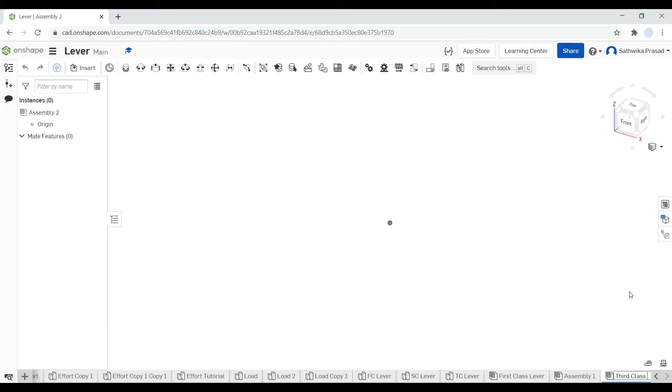I'm going to create a new assembly, then right click to rename it. I want to rename it third class lever. I forgot to label my previous one, second class lever, so I'm just going to rename that quickly too.

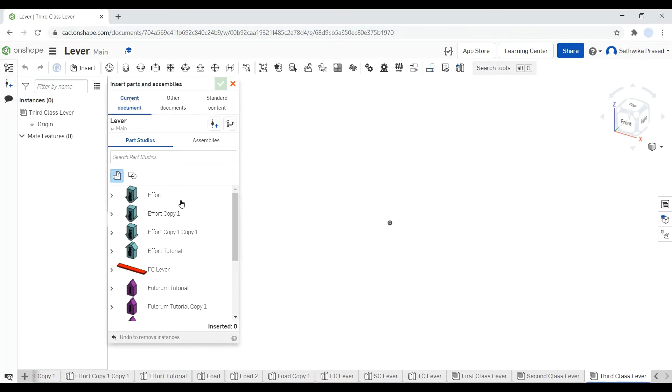Now on my third class lever, I'm going to insert all of my pieces back in. Remember, in a third class lever, I'm going to choose my third class lever piece. My effort is going to be this one, my fulcrum is going to be this one, and my load is just going to be this one. I didn't really need to make that many copies, but don't do that, be efficient. Click your green check button.

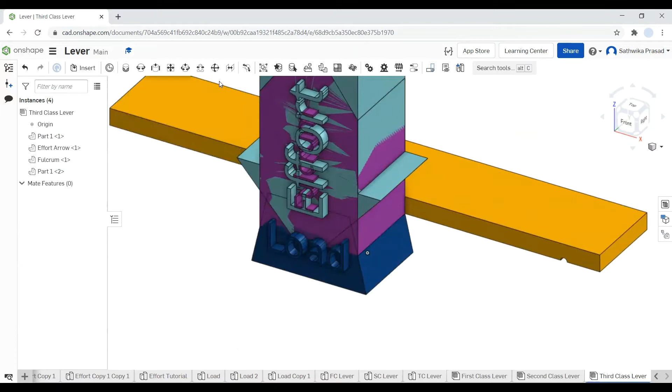Drag your pieces out. Then what you're going to do is, again, you're first going to insert your fulcrum in. Your fulcrum is super important.

So referring back, I just want to clear this up, guys. In FRE 123, for a third class lever, your effort needs to be in the middle.

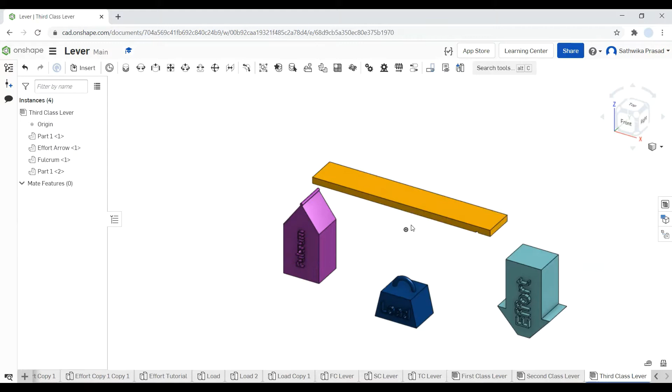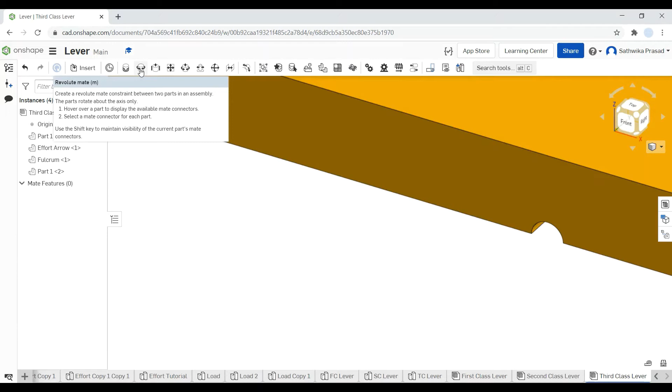So what we're going to do is first fasten in our fulcrum. I'm going to zoom in to my left. Now remember, in any lever, other than the thing that should be in the center - the effort, resistance, or fulcrum - the other two parts can be switchable. I just put them in two different places so you guys could have some variety.

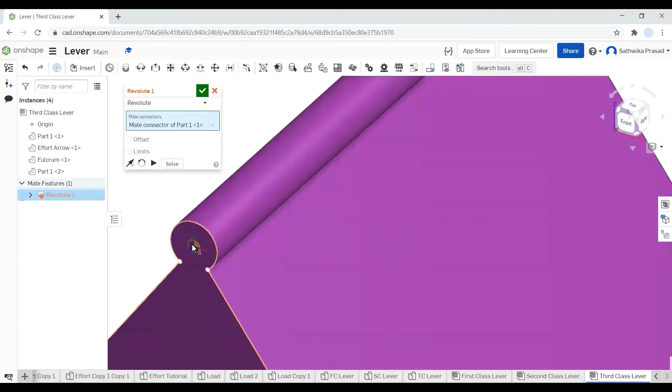I'm going to go into Revolute Mate, zoom in, and put my mate here. Then I'm going to come to my fulcrum, zoom in, make sure my mate is facing this way, and bam! I'm going to click my green check button and exit my Revolute Mate too.

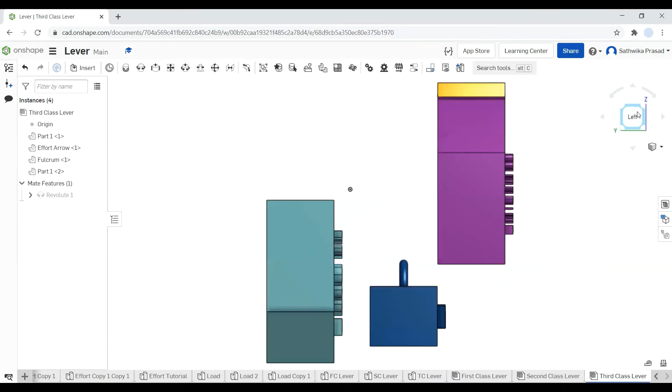Then what I'm going to do is fasten these two mates in. I'm going to go to bottom view, then top... I apologize for this. I'm going to go to my bottom view and fasten mate to fasten this load mate.

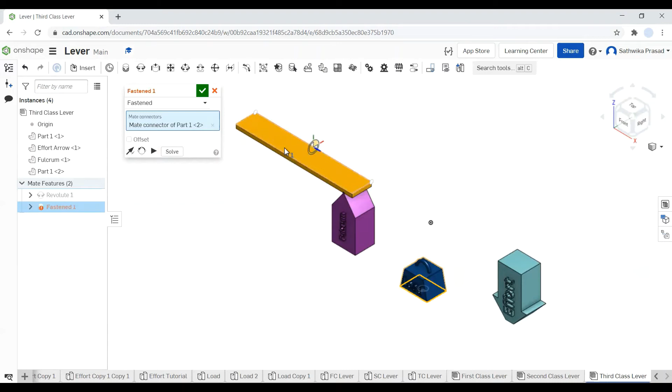To this mate over here, I'm going to come to this lever handle, then choose this. I'm going to choose offset because I don't want my load to be hanging off, because the load's going to tip off - that's not what we want.

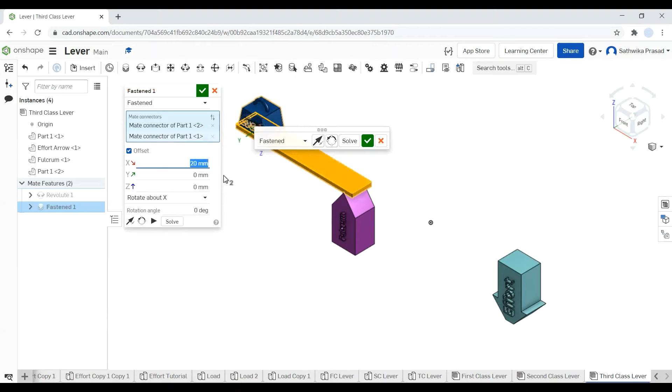So our X is going to move it sort of in. We're going to make it 10 millimeters in - that doesn't seem enough, so I'm going to make it 15 millimeters. I want a little bit more, so I'll do 20 millimeters. Yep, that's it, so I'm going to click my green check button.

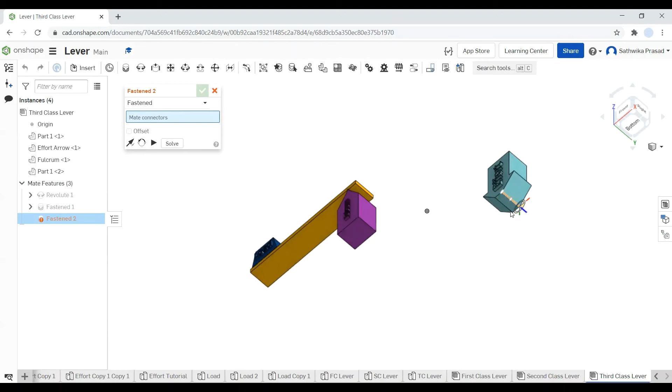Now I'm going to go into effort, go to my effort arrow, go into my bottom view, and go into my second fasten mate. I'm going to go to my bottom view. Actually, I'm going to reopen my fasten because it's acting up for me.

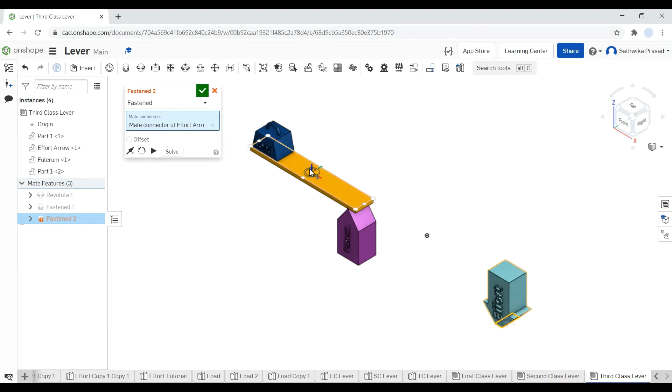I'm going to select my effort, the bottom exactly in the center right here. I'm going to go into isometric and make sure I select exactly the center of my lever bar. I'm going to select that, and voila! There you have it, everybody.

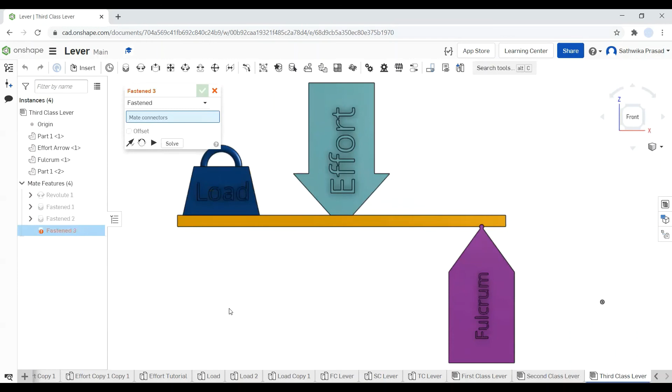Hold on, let's just check in isometric or front view how weird that looks. It doesn't look that weird, but the load seems a bit too close. Your effort is in the middle, your fulcrum is towards the edge, and your load is towards the edge, and that gives you your third class lever.

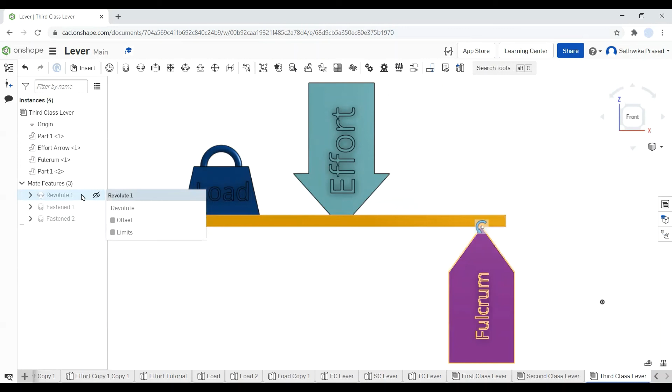So before I forget again, let's set the limits. I'm going to right click on Revolute, click on edit, set my limits. My minimum is going to be -40, and my maximum is going to be 40. I'm going to click my green check.

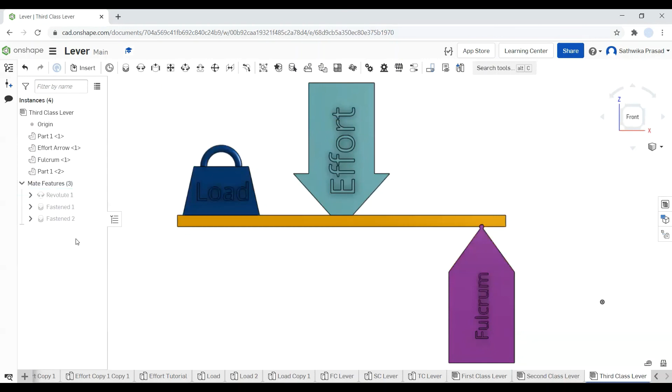Now let's animate. Let's go to Revolute, right click, and click on animate, and you're going to click the check. So as you can see here, this is what a third class lever looks like.